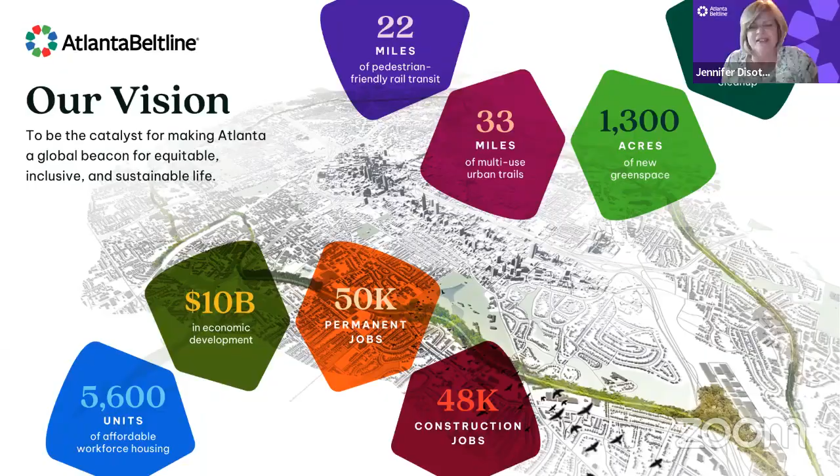We have a lot of new people on the call, so I'm going to give an overview of what this portion of the trail includes. You can see the green star to the left on the overall map, and as you zoom out, you can see the yellow portion at the bottom of the overall picture - we're down in that southeast corner. Coming off of segment 1, which is at Pittsburgh Yards, we're starting segment 2, just west of the I-75/85 overpass. Heading east, we get to Milton Avenue, which is the first delineation mark, then we enter segment 3 and continue east to Boulevard Southeast. The entire trail segment for these two segments is about 1.8 miles.

The trail itself will be our standard 14-foot wide concrete trail with landscaping. We'll have fiber duct utilities, which you'll never see but they're there working for us all, retaining walls, bridge maintenance and upgrades at the Pryor Road Bridge and also at the Hill Street Bridge. There will be pedestrian lighting and security cameras along the trail, a great improvement over the temporary conditions people have been utilizing. We have new access points going in at Pryor Road, McDonough Boulevard, D.H. Stanton Park, Hill Street, Grant Street, and Grant Terrace. Our estimated completion is the first quarter of 2026.

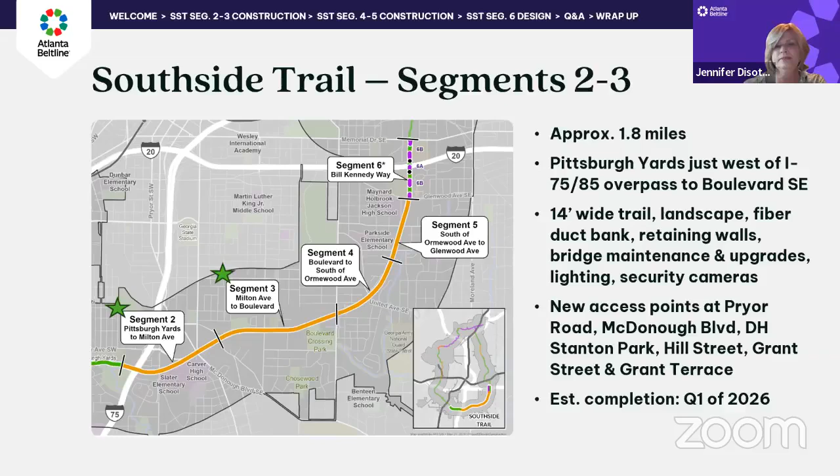Before I get into the updates specifically, we want to give a special acknowledgement and thanks to several entities that have been promoting this project, both from an idea standpoint and financially. The congressional delegation offered us great funding support through congressionally directed spending, approximately $5 million toward this project, from our senators Ossoff and Warnock and the congressional delegates in the House. We'd also like to recognize the U.S. Department of Transportation, who awarded us a RAISE grant of over $16 million, a tremendous boost to the project. The Atlanta Regional Commission Transportation Improvement Program also contributed $10 million. These were a huge support mechanism for this entire project to become a reality.

We've also been getting continuous aid and financial support from the EPA's Brownfields program, which is allowing us to clean up the remnants of the railroad that existed on the corridor for so many years.

This is just a friendly reminder: we are under construction on segments 2 and 3. There's fencing put at the trailheads, and we really need you to adhere to this because there is a lot of very large equipment running up and down the trails. It's a danger for anybody out there, whether on foot or bike. I know everybody feels like they can watch and be careful, but we cannot have you on the trail. It's an enormous liability and could be a danger to anyone on the trail. So please respect that the trails are closed right now, and use the side streets for walking and exercise. Thank you, it's just a reminder.

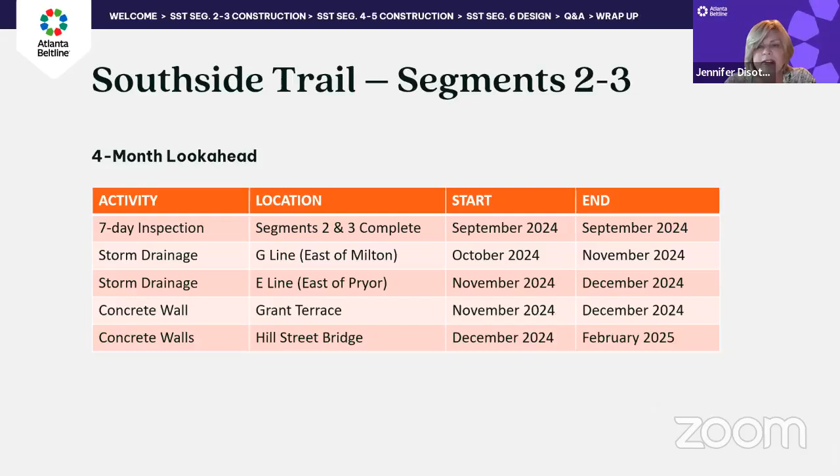We actually had the contractor mobilized to the construction site in May of this year. If you've been out on the trail, you know it was very quiet and there wasn't a lot going on, other than maybe some bush hogging. The reason is we have certain environmental commitments we have to adhere to. There's a little bat that lives in Georgia, the tricolored bat, which is on the endangered species list. They're only about 3 to 4 inches long, tiny little creatures, but they have nesting that occurs between May and July. So we couldn't do any heavy clearing of trees during that time period. We weren't allowed to start tree clearing until the beginning of August, and once we hit that date, we called out the contractor.

Reeves Young had to call out an ecologist to inspect the 2 miles of trail to see if there were any visible signs of this particular bat. There were none observed. However, we did have a couple of big brown bats, maybe 4 inches tall, under the 75-85 overpass, and that little critter is one of those bats they snapped a picture of. I thought that was really cute. So we were looking out for this endangered species, and that was part of the delay at the beginning of the project.

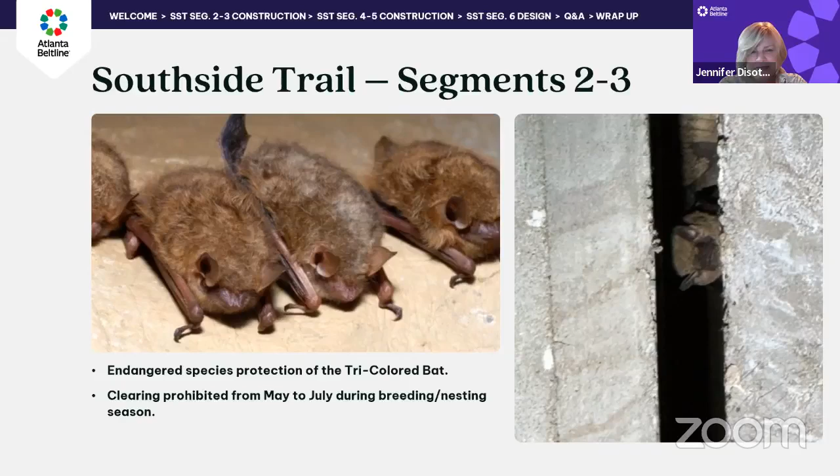In the time we started the clearing, around the beginning of August, we found a tremendous amount of debris, leftover tires, general garbage, junk, and steel scraps, a lot of things on the east side of Pryor, where a lot of that stuff was buried. They had a lot of cleanup to do over there. There was also a very concerted effort, both in the planning phase and even as we are out there constructing.

We were able to make some decisions on the fly that required some redesign or realignment to preserve some of the trees on the east side of Milton Avenue. It was a realignment of the trail. Our landscape architect on staff said, I think we can make this minor shift and save these trees. So that was done during construction, and Kimley Horn has been very agile in accommodating us with those decisions.

The other trees that were spared in this overall design were the ones east and west on the McDonough Tunnel. So there's still a beautiful arboretum there with a lot of the trees being kept and maintained on those hillsides on either side of the tunnel. So we've done a lot to try and save the trees.

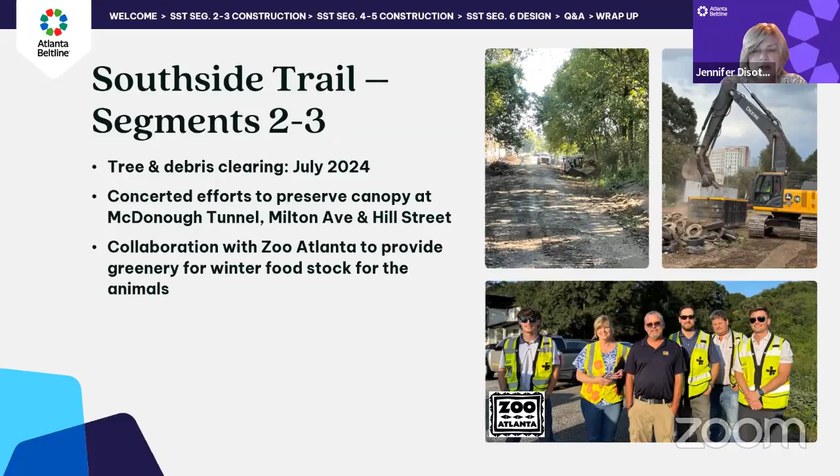So what we're looking at here are photographs on the right. Following the clearing of the trees, we have to stabilize the ground and make sure nothing leaves the site as runoff during rainstorms. So the contractor went through and followed the tree clearing operation to install erosion control. That's what you see in the top left picture, a double row of silt fence along with some tree save fence. They also repurposed the mulching from many of the trees, keeping it on the site to bolster these protection mechanisms and keep runoff from leaving the site.

That was done above and beyond what was actually shown on the drawings. The contractor, Reeves Young, has been very cognizant of making sure these protections in place are sturdy and will hold up in storms. And we had a good test just over the past week.

In addition, we also completed work on the building you're probably familiar with, sitting off of McDonough Boulevard—the old South Fulton County Health Department. It's been unoccupied for quite some time and did have asbestos inside, which we abated before it was demolished, but the building is down now. What's going to take its place is the new access point for McDonough Boulevard and a very beautiful walk experience with a lot of trees and plantings, again alongside those existing trees that were at the trail. So that's going to be a really nice new access point with a lot of greenery.

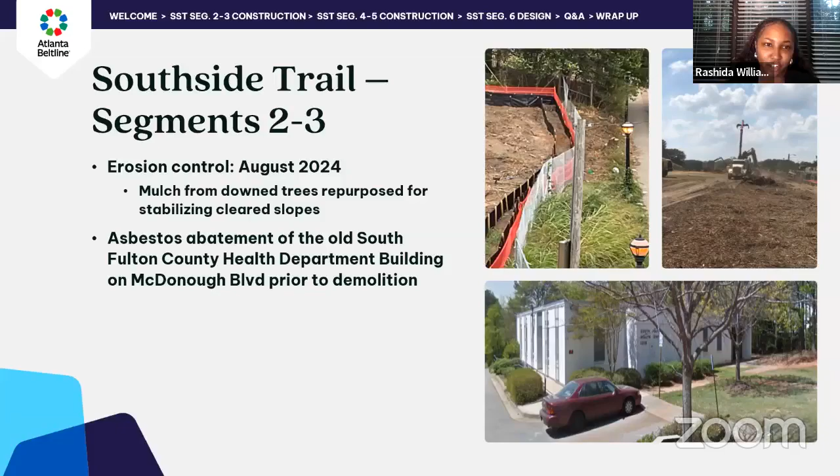Thanks, Rashida, and good evening everyone. My name is Nancy Newell, and I am the project manager for this segment of trail between Boulevard and Glenwood Avenue that is currently under construction. I'll be giving you some updates as well as showing progress photos of what we've been working on since the last time we met. All right, next slide.

This is just a project overview of what we're doing and where we stand. This segment of trail goes between Boulevard and Glenwood Avenue. It's a little over a mile, and we are implementing the mainline trail, which is our typical 14-foot wide concrete path. We also have two bridges going in, one at United Avenue and the second at Ormewood Avenue, adjacent to the existing Ormewood Bridge that will be saved for future transit use, if able. We've also got some ADA access ramps going in.

One will be at United Avenue, there's one going in at Delmar, one at Ormewood, as well as an access path to the west side of Mercer, and we'll be putting in some concrete stairs on the east side of Mercer. As with all of our trails, we'll be installing fiber duct bank underneath the trail. We'll be putting in a whole bunch of landscaping at the end, and we'll also have lighting and security cameras.

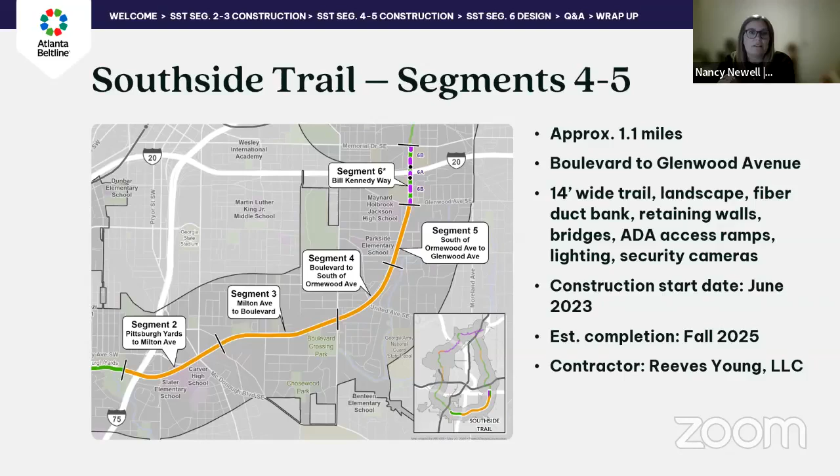But the good news is we have most of that stuff that's going underground - we've got most of that in. The stuff that we still have to do, we really don't anticipate any utilities in those areas, so keep your fingers crossed, knock on wood, that we don't run into anything. With that, our current estimated completion date is going to be next fall. Again, we've got Reeves Young on board doing the construction here. All right, next slide.

Just like Jennifer's slide that she presented, this is just a reminder that the trail is closed. I know that this might be the most convenient route for you to get where you're going or to get home, but for your safety, please stay out of the construction area while we are working. It's just out of an abundance of caution - this is a pretty active construction corridor, with large equipment running up and down the trail at any given time of day. So please stay off, and we appreciate your cooperation during this time. We look forward to turning the trail back over and opening it up so the community can use it. All right, next slide.

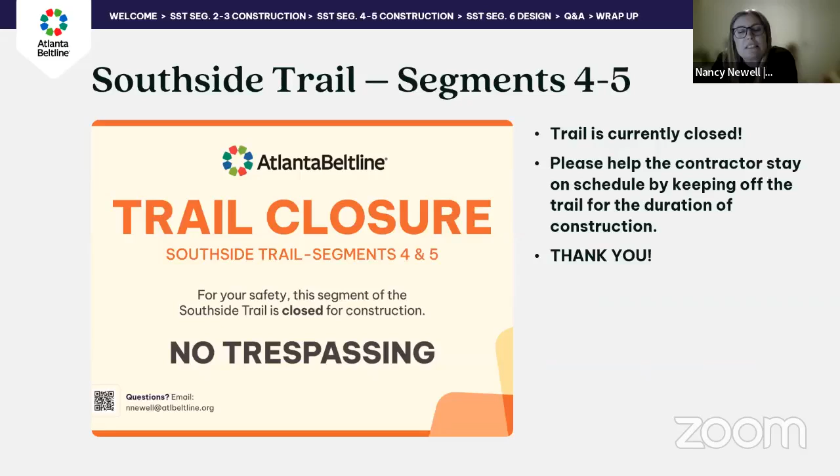This slide just shows some of the activities that we've got coming up within the next couple of months, starting with the ramp construction at United. This has been going on since July, and we expect to wrap up at the beginning of next year. We've also got the wall construction for the ramp down at Delmar. That's been ongoing a lot longer than this past August, but we hope to wrap that up by the end of this year and move on.

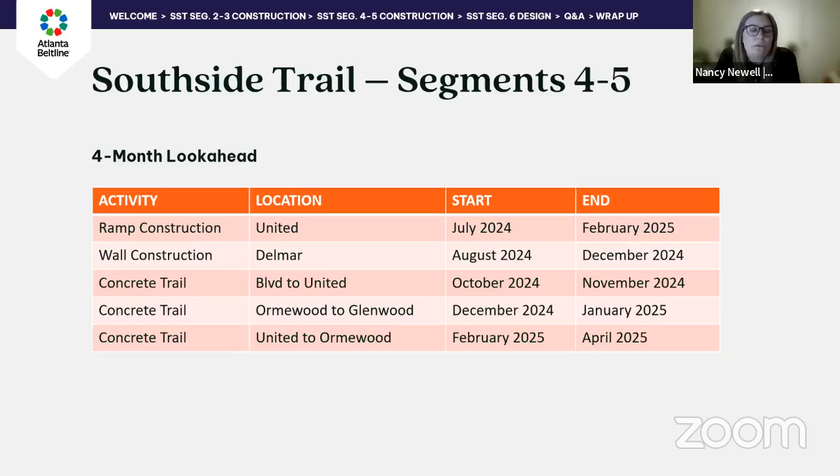We're hoping to see some concrete trail pours towards the end of this year. We're hoping to get the segment between Boulevard and United poured at the end of this month. It might get pushed, but that won't take long once we get all the stormwater pipes underground. The next segment would be between Ormewood and Glenwood, hopefully starting at the end of this year. Then the final segment will close the gap from United to Ormewood, hopefully early next year or next spring.

These are some progress photos of what we've been able to do. The photo on the left shows the bridge abutment at United Avenue, closer to Boulevard. The photo on the right shows the other side, on the Ormewood side.

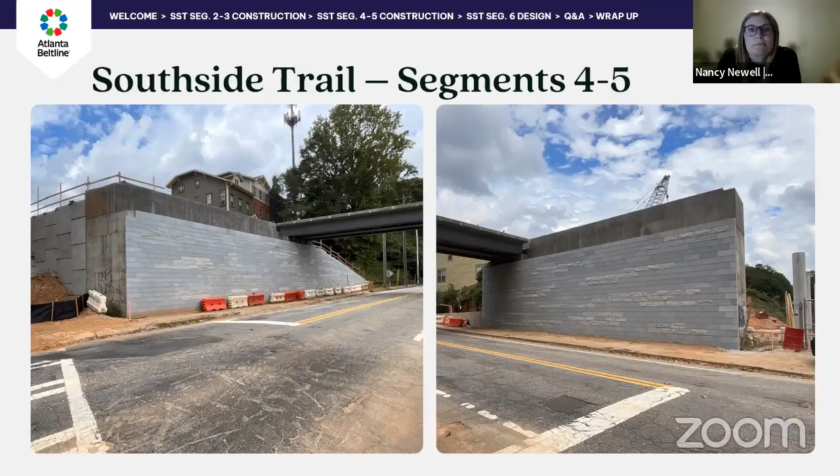These photos were taken at United Avenue for the ramp construction, showing the progression of pouring these columns. The photo on the left shows the concrete pad at the bottom of the column, with big steel piles driven underneath. We pour the pad on top, then the column encasement goes over that, with rebar sticking up. Then they pour the concrete that makes up the column, shown on the right. The right picture also shows the backfill of the concrete footers so they're not exposed.

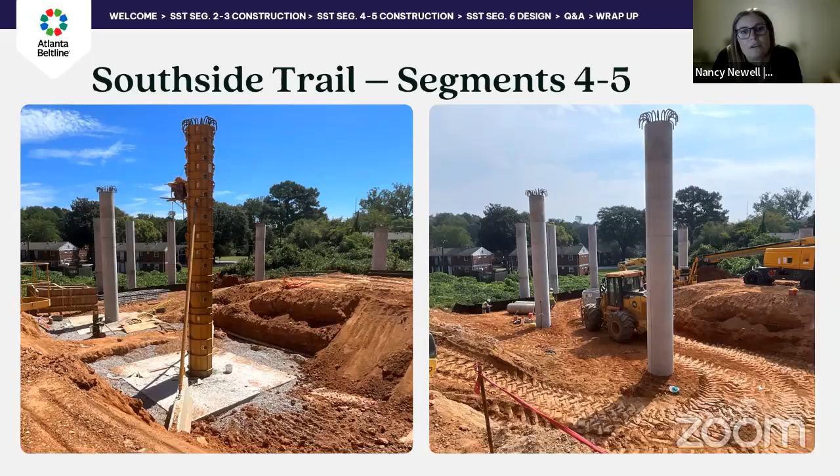This is again the ramp structure, a zoomed out view. We have 10 of the 11 columns poured and ready to go. We just have one left, the shorter column on the far side of the photo. Then they'll be ready to excavate in between those columns, where there's going to be a stormwater pond. They'll start excavating dirt and preparing that for the pond, then go back and finish up the ramp.

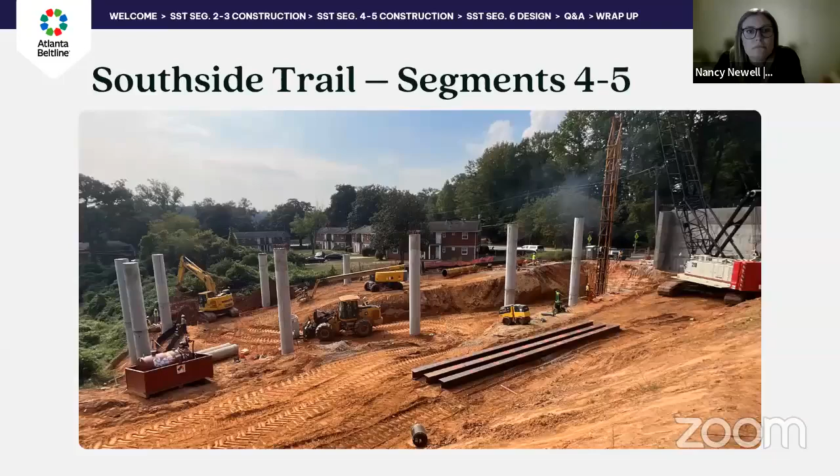These photos are down at Delmar. The photo on the left shows some of our Cor-Ten walls, which are retaining walls for that slope and the stormwater we've got in there. The photo on the right shows the walls for the ADA ramp that will lead up and tie into Delmar.

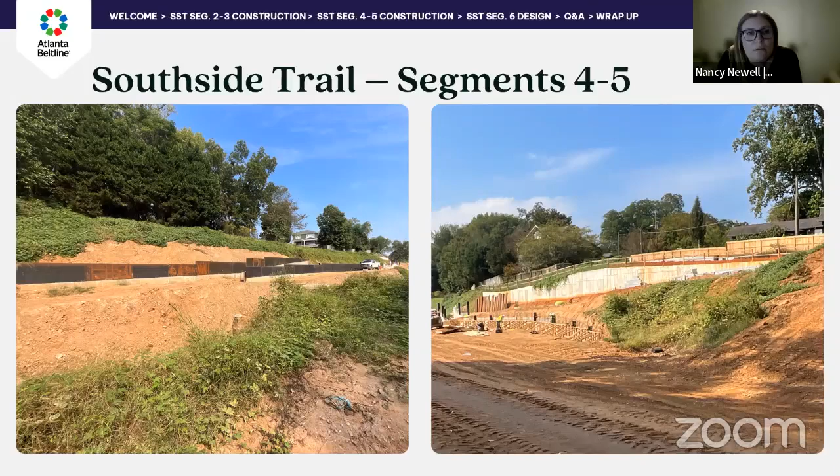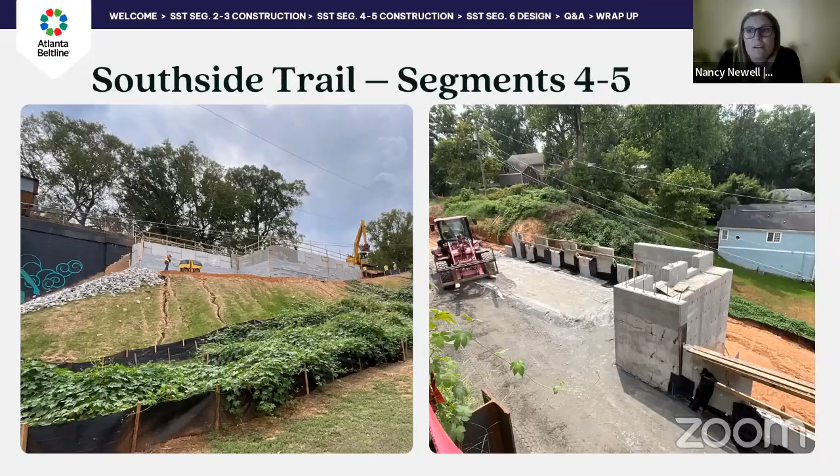Hey everybody, Shaun Green here, principal engineer for Atlanta Beltline and project manager for Southside Trail Segment 6, our vernacular, also known as Bill Kennedy Way. This is an overview. We're really towards the front of this project. We've submitted a concept report to Georgia Department of Transportation to put a new bridge over I-20 for the Beltline Trail. We're still in the process of seeking federal funds for this, and as a result of going through that process, it will be a couple years of design work before we could start construction.

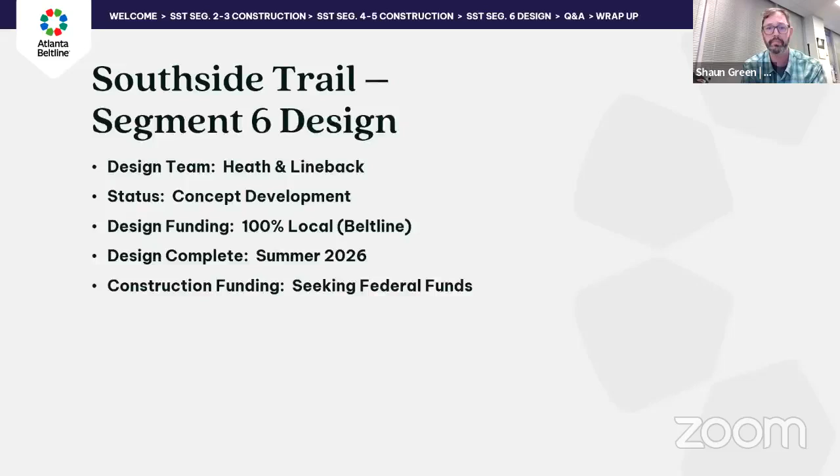So we're at the 30% mark with the concept report submittal. The work at Memorial Drive is just trying to clean up the corner in the southeast, where I think the Taqueria Tsunami place was. Then all the way down to Glenwood Avenue, taking the interim cycle track out and doing a full Beltline trail implementation integrated into Glenwood Park.

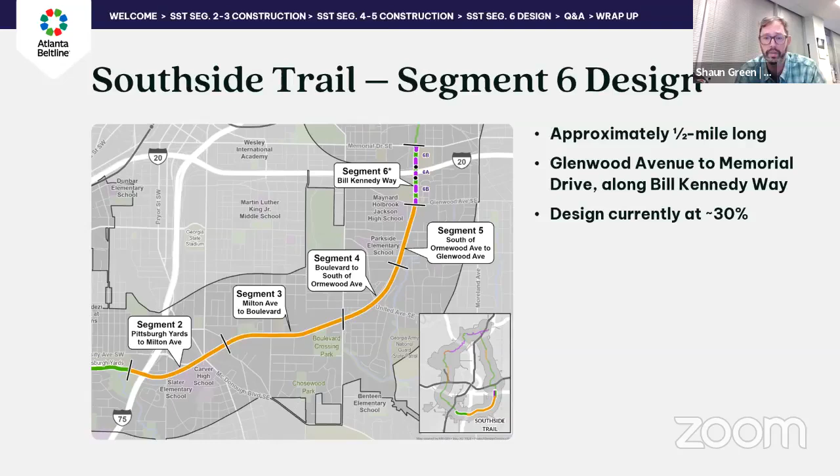Full Beltline trail implementation. The intention is 14-foot concrete paving, lights, cameras, landscaping. The bridge itself is also looking to carry that 14-foot trail over with some landscaping on both sides, not very far off of the existing Bill Kennedy Bridge over the freeway—maybe a 5 or 10-foot offset to tighten that up a little.

What we're getting at is the trail user safety and comfort modifications at those intersections at Madison Yards. The I-20 off ramp is something we're looking at for a bigger geometric change, to try to prevent cars from flying through the intersection into the houses and into the Beltline. South of there, we're looking at Faith Avenue, the traffic signal just south of 20 where the Chick-fil-A driveway is. And Garrett Street is the all-way stop a little farther south towards Glenwood Avenue.

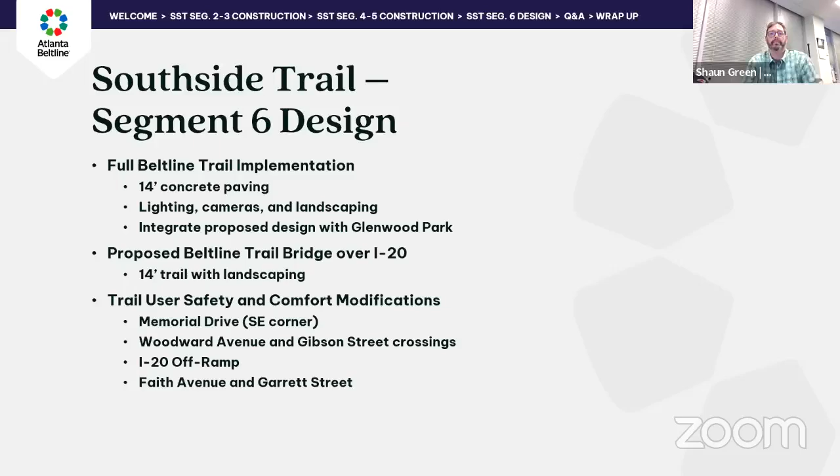In the traditional sense of north being up, this is our study area in red, which is the extents of Bill Kennedy Way from Glenwood up to Memorial. Bear with me because this is a portrait project in a landscape world, so we're going to rotate this thing 90 degrees.

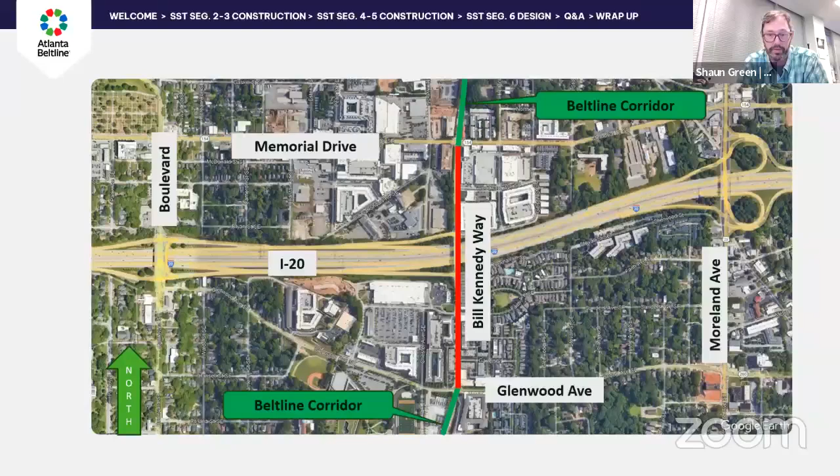There we go. So north is now to screen right. Same project extents with Glenwood on the left and Memorial Drive on the right.

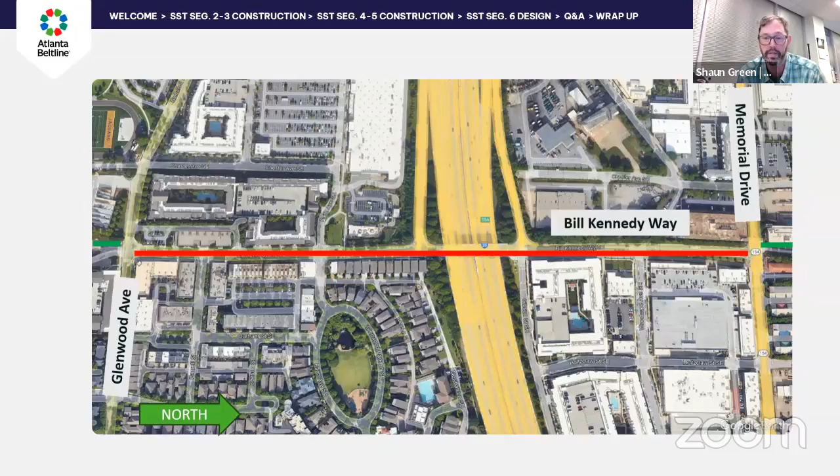The next slide should show us the different ownerships of the roadway. So it's state highway that includes Memorial Drive down to the I-20 ramps. Then south of that ramp down to Glenwood is all City of Atlanta owned right of way and street. So we have two different sets of permitting requirements that we will end up going through to implement this project.

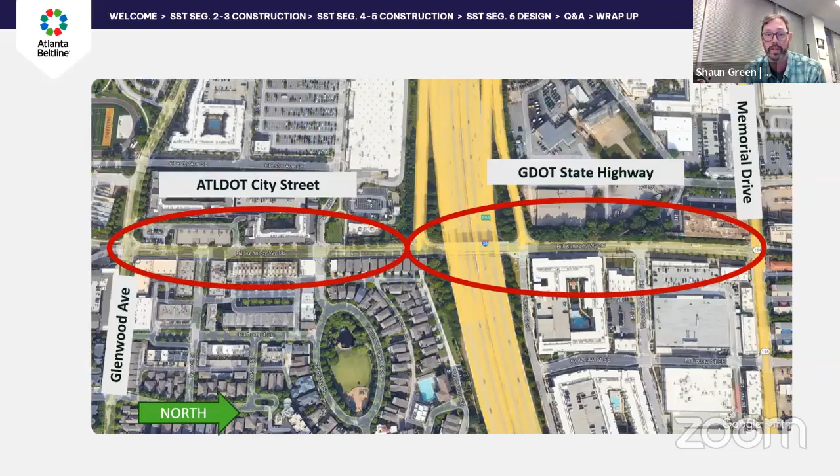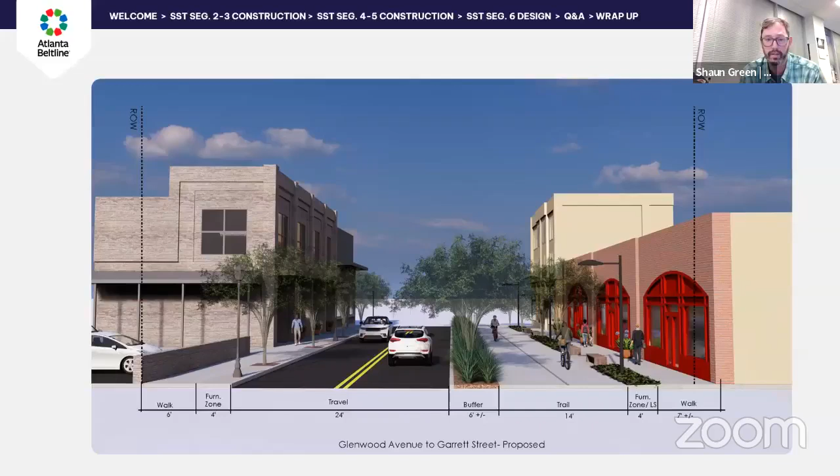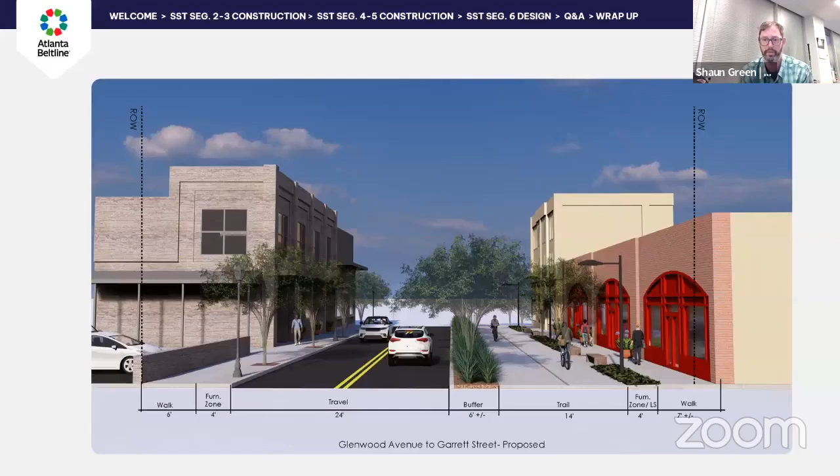If you go back and look, these dimensions are approximates as to what we're getting at. This was done before we got the survey, but the graphics here are really the takeaway. Basically we're taking out the on-street parking along the western curb of Bill Kennedy, shifting the carriageway for car, bus and truck traffic over to the west in order to create space for the full Beltline 14-foot trail implementation, and a sidewalk between the doors and the trail so that people coming in and out of the buildings on the right don't just throw a door open into a trail.

So there's landscaping, lighting, and cameras—basically what we're looking at is a building face to building face type of project here.

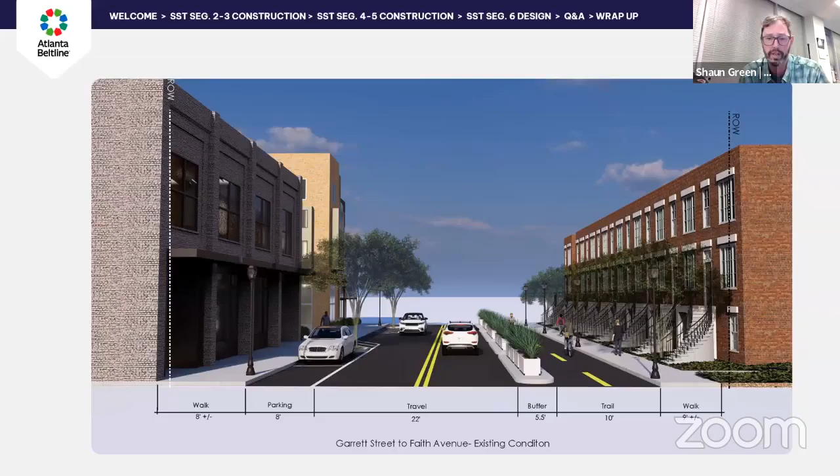This is the next block north, looking up towards Faith Avenue, with the townhouses on the right. Again, this is the existing condition with the on-street parking and the planters that separate car traffic from bicycle traffic and sidewalk traffic.

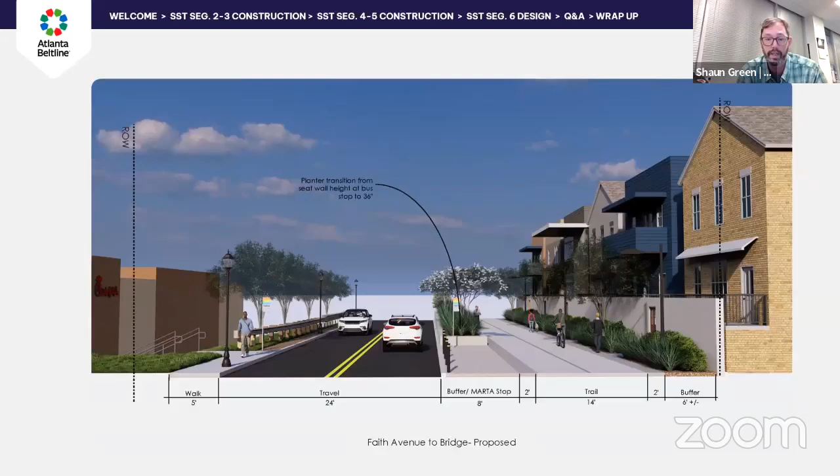And again it's very consistent: we're taking out the on-street parking, shifting the carriageway for the vehicles over, carrying the trail through, and improving the MARTA bus stop with some landscaping.

Because there is still a buffer there between the walkways through the sound wall, we feel like that buffer is going to be sufficient for people coming and going from those individual houses there, and still have a safe entry and exit from the trail.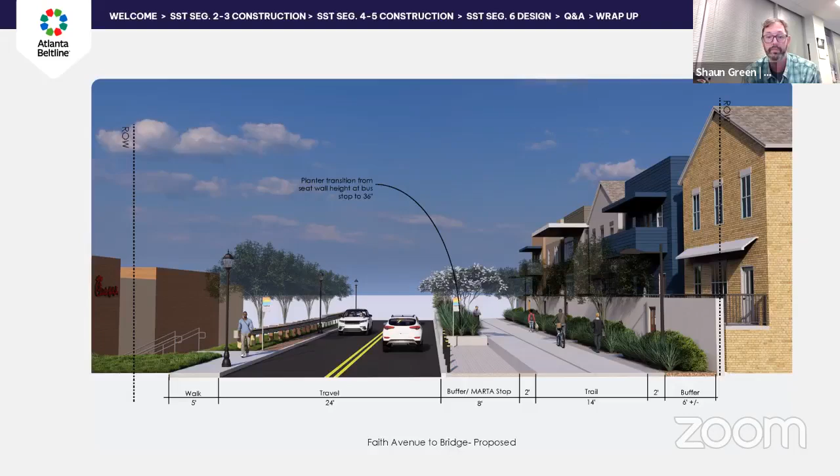Next slide, please. So this is the existing condition for the I-20 bridge as it currently exists. You've got two northbound lanes, with one being a turn lane, one lane southbound, with a concrete barrier wall.

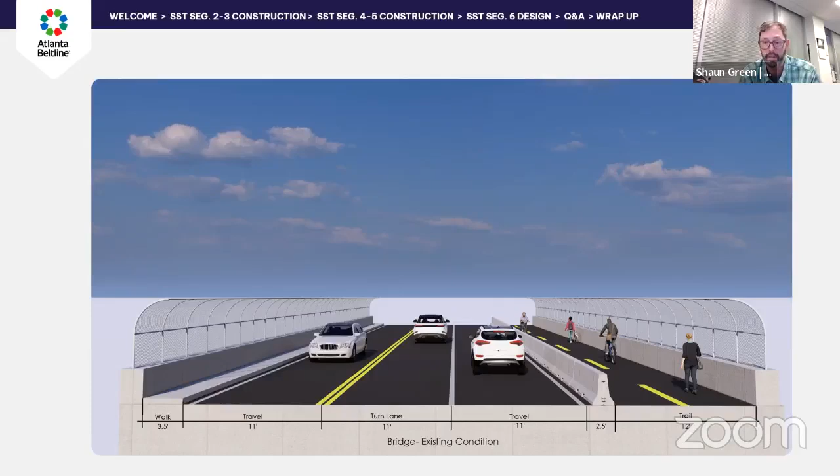Bicycle and pedestrian access to the screen right there. In the future conditions shown on the next page, the concrete barrier is removed from the existing bridge. You can see what I was getting at earlier with respect to some landscaping on both sides of the concrete trail that will carry over on a new bridge over I-20, separated a little bit from the existing bridge of Bill Kennedy Way.

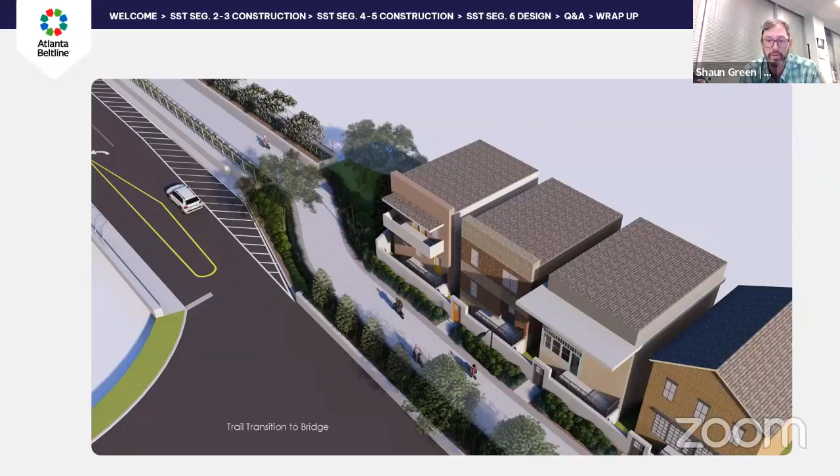Next slide, please. So I've shown you what this is kind of envisioned in section, but to kind of get a sense as to how this all plays out geospatially, you can see where the trail falls in front of the houses and the sound wall there. There's a little bit of an S-curve that gets us out off of the existing bridge and over onto the proposed bridge, so that can go, northbound, southbound trail access.

The concrete barriers come out. We're going to paint that out, work with GDOT to figure out exactly how we can do that. But there's no reason to carry any more traffic capacity on that bridge than the way it's striped right now. And then the words where it says trail transition to bridge, that is the I-20 eastbound off-ramp traffic signal right now. We've got some ideas that we're working with the department on to kind of consider maybe even a splitter island, and we'll get into that in a second.

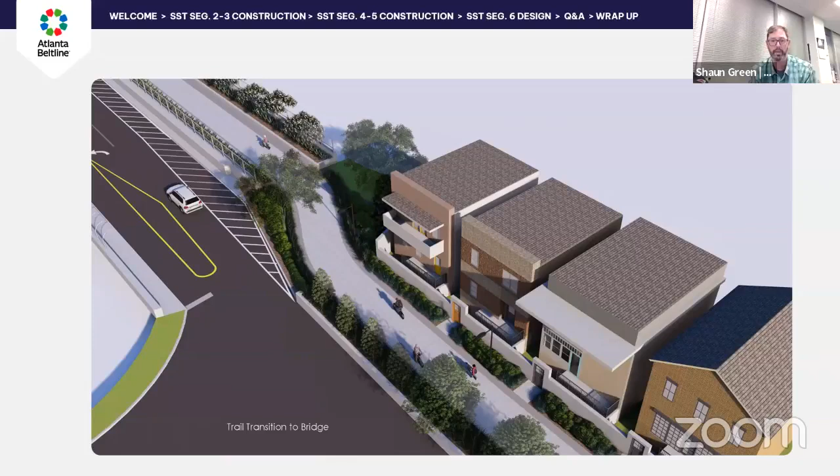But the other thing I wanted to point out is between the asphalt of the intersection of the I-20 off-ramp and the landscaping and the trail and the houses, we are looking to put in a concrete barrier wall that will be stepped up a little bit to help increase its visibility, and also to protect the trail users and the houses behind it from the interstate off-ramp there. Next slide, please.

So within the Glenwood Park area, there's a lot of little streets, and it's a lovely little new urbanism community. This graphic here is just to show the existing vehicular access within the community at large. You can see that there's a bunch of different ways that people can move around because of the grid of streets and the tight grid that they have that exists right now.

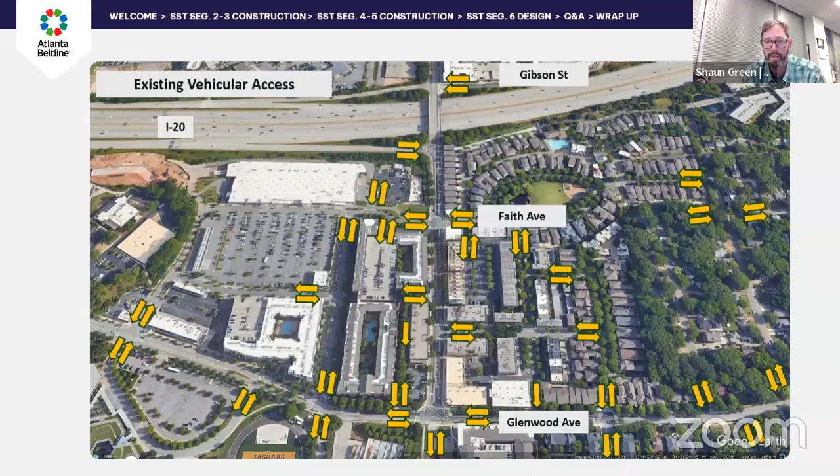On the next slide, I want to point out some of the things that we're looking at. So in green is the proposed trail location, with the black line representing the future vehicle location, just shifted over a little bit. There's a couple modifications that we are looking to do to improve the safety and comfort of the trail user experience through Glenwood Park on Bill Kennedy Way. Starting down at Glenwood Avenue, I already talked about the shifting of the carriageway to the west.

One of the things we're kicking around is to reduce the number of vehicle and trail user conflicts. We're thinking about, and we'll be working with the city on this, converting Garrett Street to eastbound only, so that the only cars that would be conflicting with the trail users would be cars traveling north-south on Bill Kennedy Way, as opposed to cars on Garrett Street looking for a gap in traffic, looking around buildings, trying to see cars and hopefully look for trail users.

So this is one of those safety improvements that we think we can implement. We are going to be doing a traffic analysis to take a look at this and see what the implications of that are, but we think there is going to be a pretty solid safety benefit to that. Similarly, up at Faith Avenue, on the Chick-fil-A side, we're proposing that that become a westbound only driveway or roadway, between Bill Kennedy and the apartment deck there at Enzo. So there would not be return access to Bill Kennedy from the Chick-fil-A; they'd have to go down Chester to get to Glenwood Avenue.

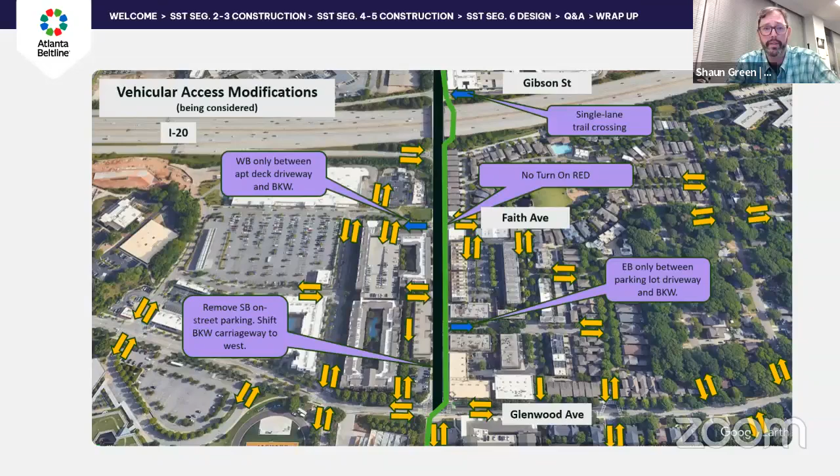So those are some of the things being considered right now. We'll be doing a larger area traffic study, working with Atlanta DOT from Faith Avenue south, and Georgia DOT from Faith Avenue north. Next slide, please.

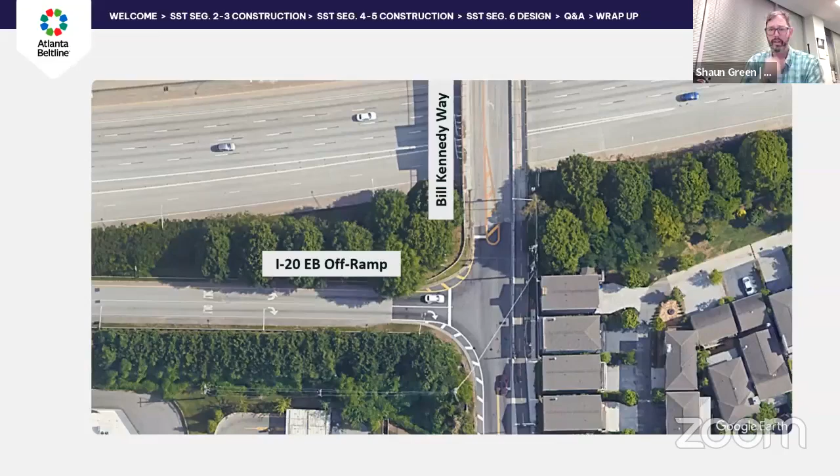I mentioned earlier the I-20 off-ramp and thinking about a splitter island to geometrically encourage people, through engineered solutions, to either turn left or right instead of continuing straight. The next slide shows what this could look like with a splitter island at the top of the ramp, maybe even tweaking some of the geometry of Bill Kennedy Way. Through that traffic study we'll look at whether it makes sense to make it an all-way stop or keep it as a traffic signal. That information will be forthcoming once the traffic study is up and running and completed and reviewed. Next slide, please.

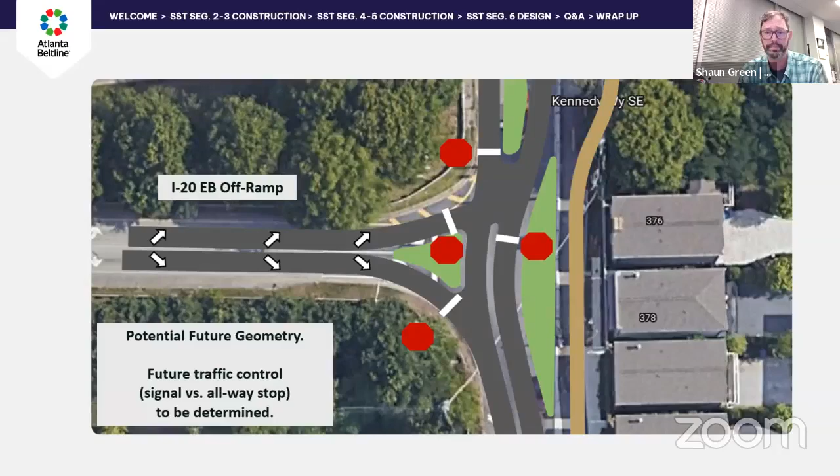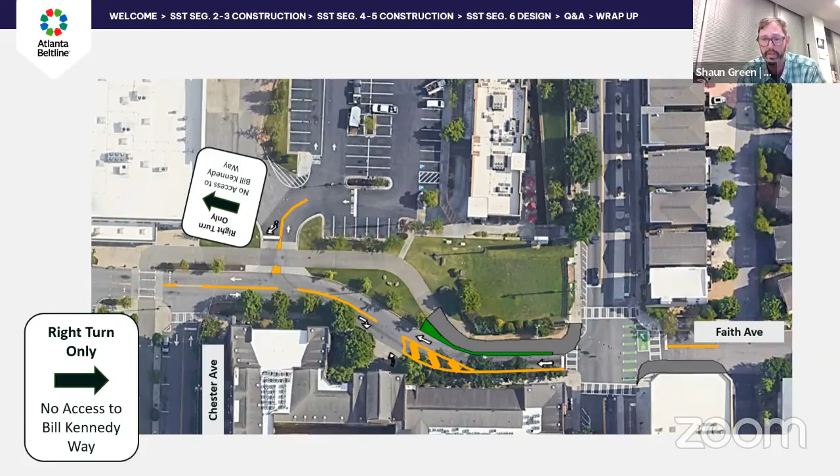So basically, all traffic going to Chick-fil-A would have to turn right out of Chick-fil-A and go down Chester Avenue. We'll be looking at the intersection of Chester and Glenwood as a result. This isn't necessarily exactly what will happen, but we think it's a solid proposal that can still get traffic to and from Chick-fil-A, reduce traffic congestion at Faith Avenue, and make that trail connection safer and more comfortable for everyone. Next slide, please.

Well, that's my time. Rashida, the floor is yours. Thank you, Shaun, I truly appreciate that.